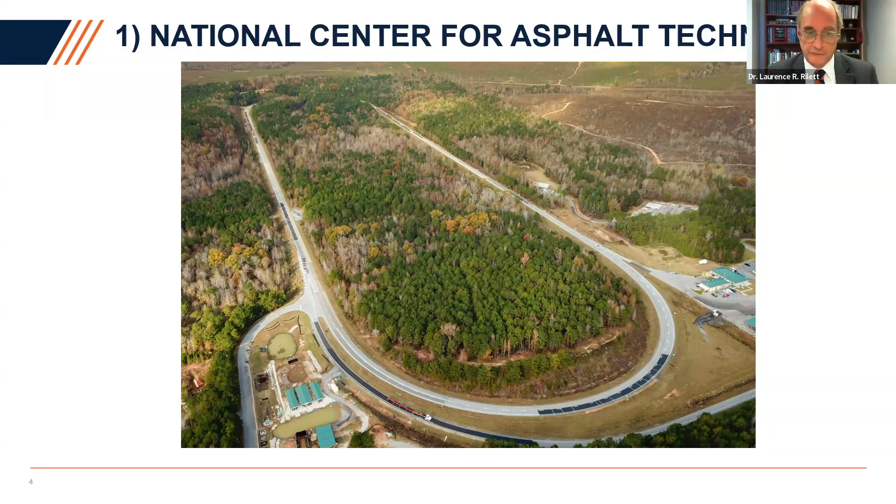We're probably most famously known for our National Center for Asphalt Technology. It's a 1.7 mile, about 2.7 kilometer test track for pavement with accelerated testing. They put down pavement in different sections and test them, accelerated with very heavy loads going around continuously: 5 trucks pulling 3 heavily loaded trailers, about 400 laps per day, on a 3-year cycle. Right now we're in our 9th research cycle. It's a way of testing different pavement mixes under accelerated conditions to see if they have potential for use on the United States highway system.

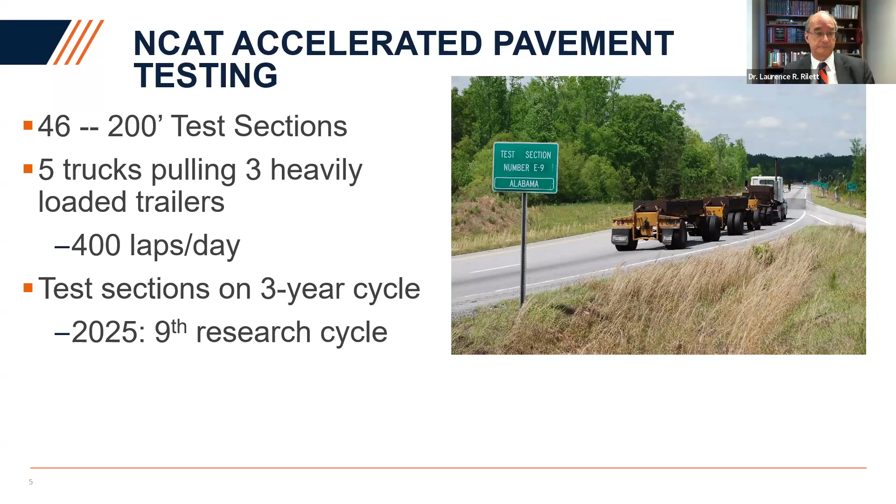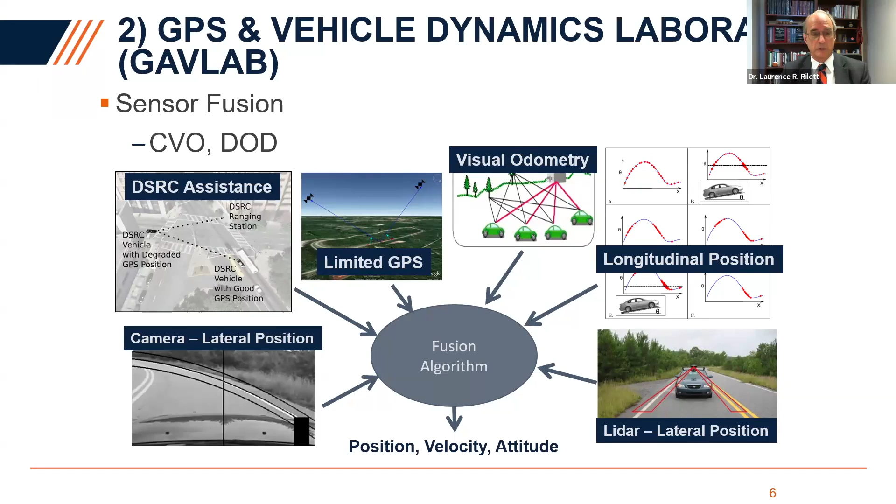We're also pretty well known for our autonomous vehicle work through the GAVLAB. As you can imagine, it's lots of different things: getting GPS, doing visual, doing LiDAR, fusing all that information together. The expertise here is on rural areas and degraded environments. So what happens if you lose your GPS? Can you still do autonomous vehicles?

We do have an autonomous Tiger racing team. You can see on the bottom right, I'm running the video right now. That's our race car. It's going approximately 170 miles per hour, about 20 miles less than the record for autonomous vehicles, but they've been running this for a number of years now. All the software, all the technology was developed at Auburn by our students.

And then lastly, what I do is looking at simulation. This is some work we're doing on simulation of everything: the driver, the roadway. We want to get to the point where we can simulate the vehicle driver, we can do an AI driver, we can do a complete environment, as well as the mechanical engineering of the vehicle. So that's our overarching goal: can we simulate all aspects of the transportation system? Theoretically, you could drive a transportation system, whether it's a roadway, an arterial, or a highway, before you even build it, and see what the issues could be.

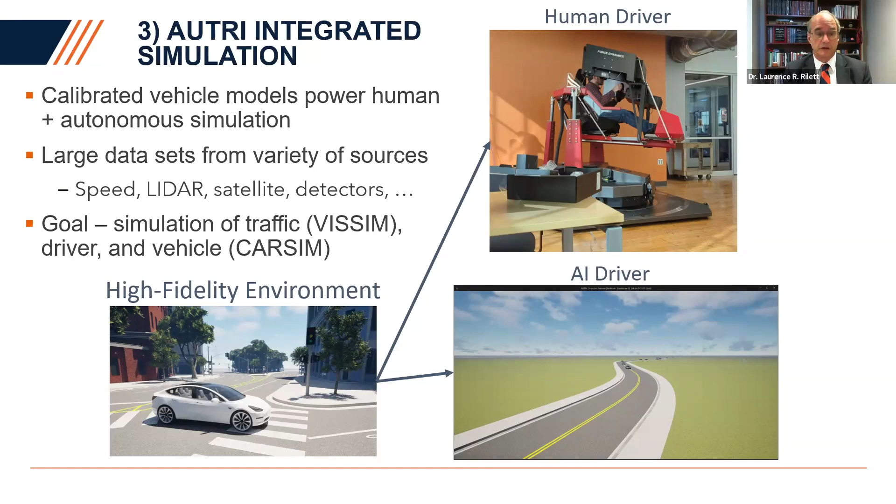So lessons learned, we're a very broad institute. We have lots of challenges related to big data. We were interested in resiliency, reliability, and sustainability. That's a very brief intro to our center, our institute.

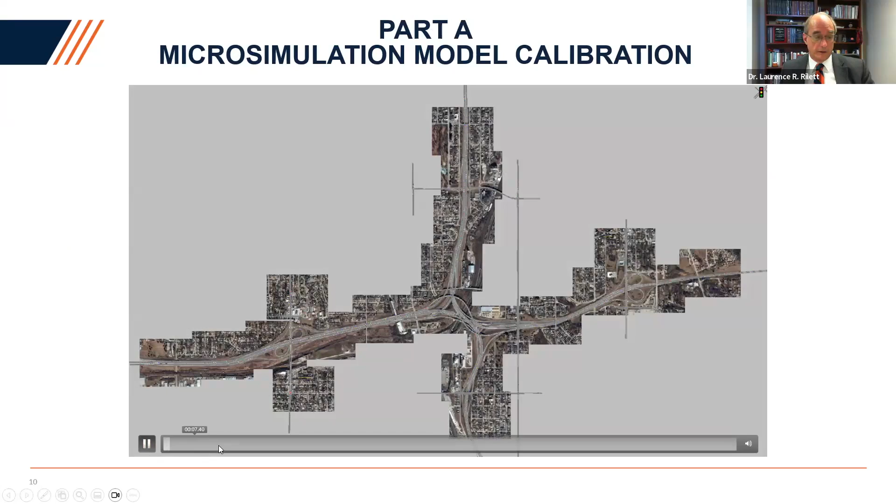And now I'll go on to the main part of the talk, which is microsimulation models. Right here we have a microsimulation model that we developed, a very standard one. This shows an interstate highway. You can see the vehicles moving.

You can do very sophisticated things. This model is a fairly old one, but it still shows the capacity of what you can and cannot do in terms of simulating traffic.

A natural question is that the models have become very sophisticated, with lots of parameters. The question I want to ask is, how do you know if this is a good model? My position is it's a good model, but only because I'm the one who developed it. So the real question is, how do we know something like this is actually replicating reality?

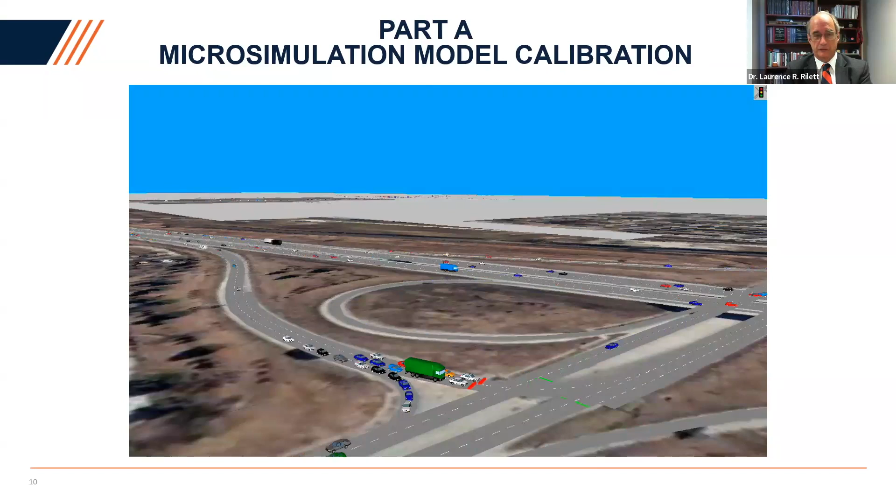The answer to that is model calibration. Very simply put, you have these default input parameter values in the model. We modify those so that the model accurately replicates the observed local traffic conditions. How do we do that accurately? We compare the simulated and observed data. The question really is, what criteria and what statistical methods do you use? That's going to be the focus for the next few slides.

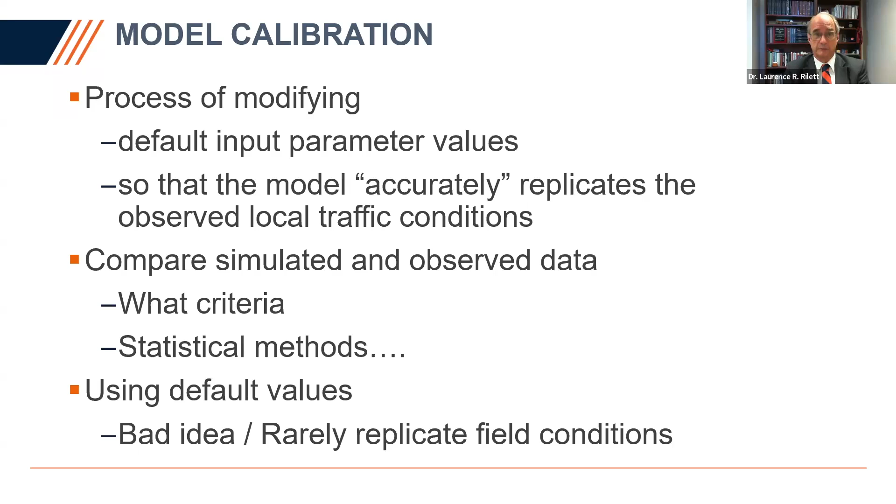So how do we know whether it's a good model? How do we make it better? As a caveat on all of this, using the default values, just taking the simulation model and running it, is usually a bad idea. It rarely replicates field conditions, and that's based on 30 years of experience. I've rarely had anything where I could just take a model and run it and be satisfied with the results.

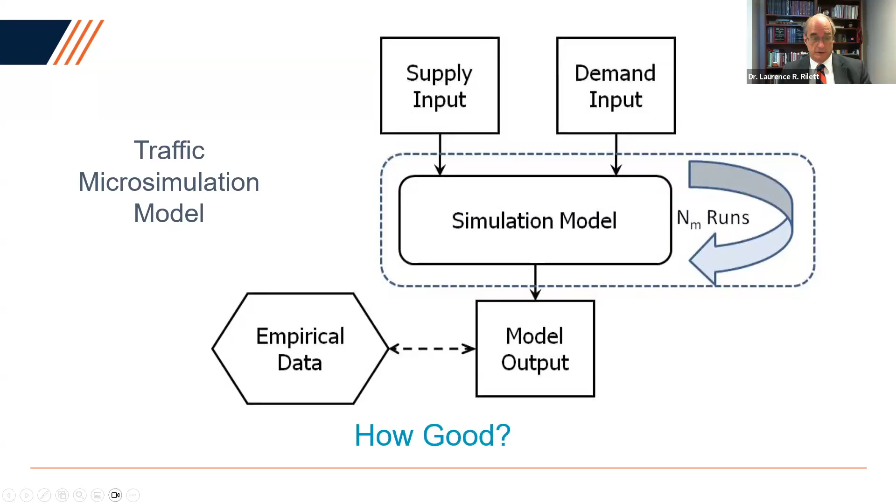Now, you might run it once, you might run it n times and then average it, but you do get model output. The question is, how do we know whether it's very good? You could take the model output, travel times, and compare it to empirical data, travel times. So how good is it? Well, you do a comparison - what do you compare? You could do statistical tests.

You could test the mean. You could use t-tests, mean absolute error ratio, what's the percentage difference - I'll talk more about that. There's lots of ways of testing whether the data that you're getting from the model actually replicates what's in the field.

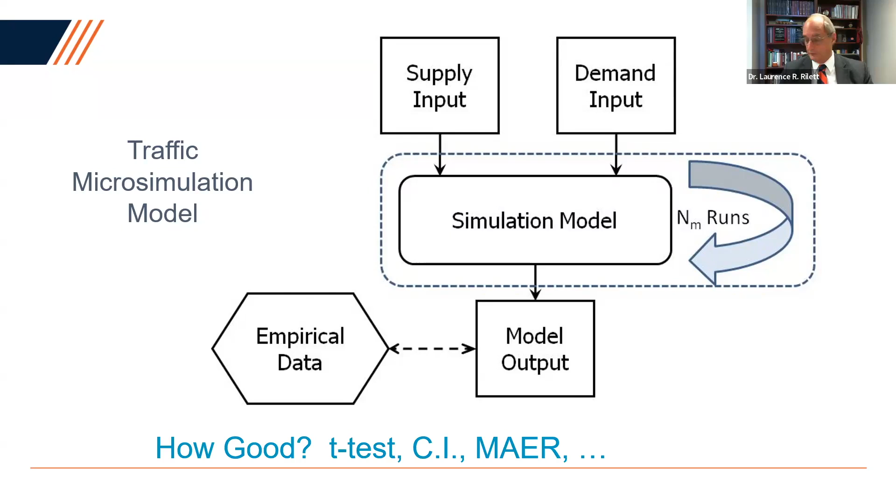Here's an example we did a few years ago. On the y-axis is average flow rate, vehicles per hour per lane. On the x-axis is station number, or length - there's different places where we're collecting data on a highway. The observed data is this dotted line. The red line is the 95th percent confidence intervals from the observed data. So we're collecting data, we kind of know what the average volume flow rate is, we know the confidence on it. And then the dark line is the simulated data.

The question then is, is this a good model? You might say, yeah, it's pretty good - it's within the 95th, so it's coming close to the observed, I'm satisfied with it. However, you could also say, well, there are parts where it comes outside the 95th, so I want to make it better, it's not exactly what I want. That's up to the modeler, obviously. But this would be an example of how you compare simulated data with observed data.

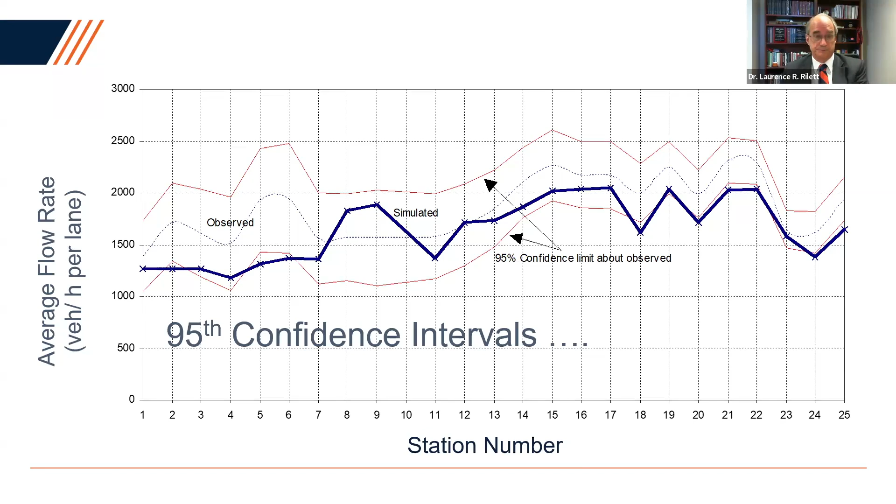If you didn't like the model, if you said, oh, I don't like this model, how can I fix it? If you're doing it by hand, you could say, well, I have my model output, my data. I could optimize it, I could change the model parameters and rerun it, and keep doing that until either I get a solution I like, or I can't find a solution - there's no way to calibrate the model to the empirical data, and at some point I'm going to stop. So calibration is just changing those parameters so that when it models the supply and demand, the empirical and the model output are similar enough that the modeler is satisfied.

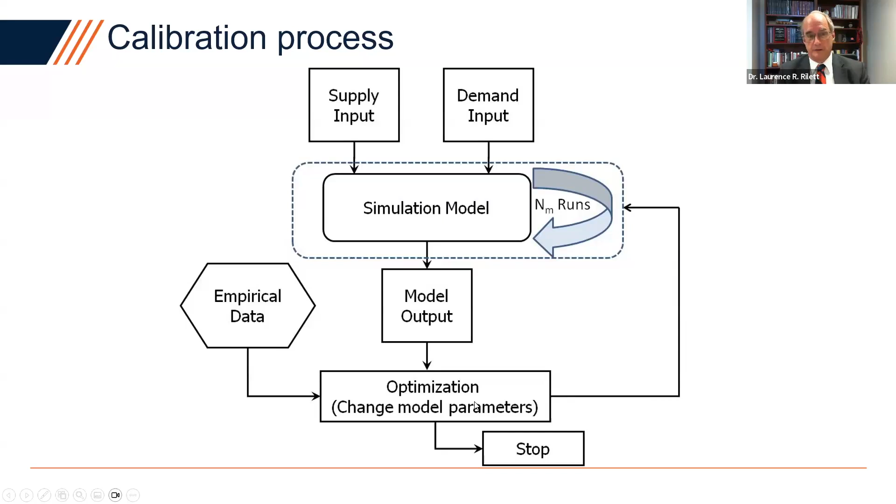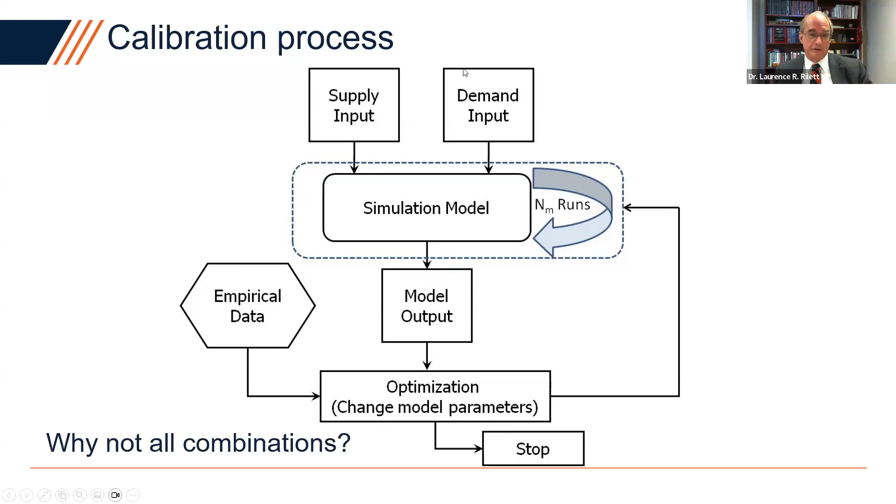So again, how would you test it? You could use mean absolute error ratio - I'll talk about that in a minute. You could do a t-test. There are others. A natural question is, why not just do every combination of all the model parameters? The answer is, you could quickly show it's in the tens of millions. To even do a simple model will take a long, long time to check all combinations. Even with our new computers, it's almost impossible to do that in any reasonable amount of time.

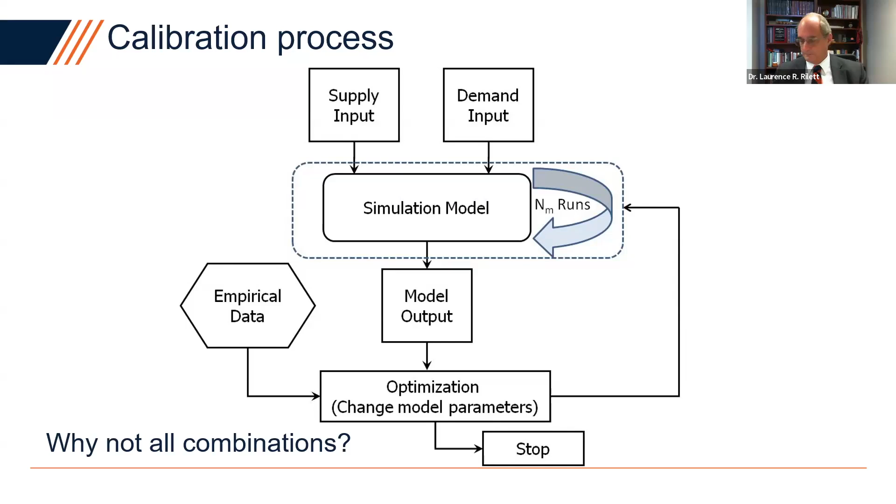So for calibration, what are the traditional measures of similarity? I picked root mean square, mean absolute percentage error, mean absolute error ratio. They're all very similar. You take your simulated data, could be average travel time, subtract off the observed number - what was the observed travel time - then simulated divided by observed. Divide by the number of observations, and you get an average percentage difference. The thing about these metrics is they're only valid if the distributions underlying them are identical. That's a pretty big assumption for traffic, and I'll show more about that in a bit. But we use it a lot - it's the average difference between the means.

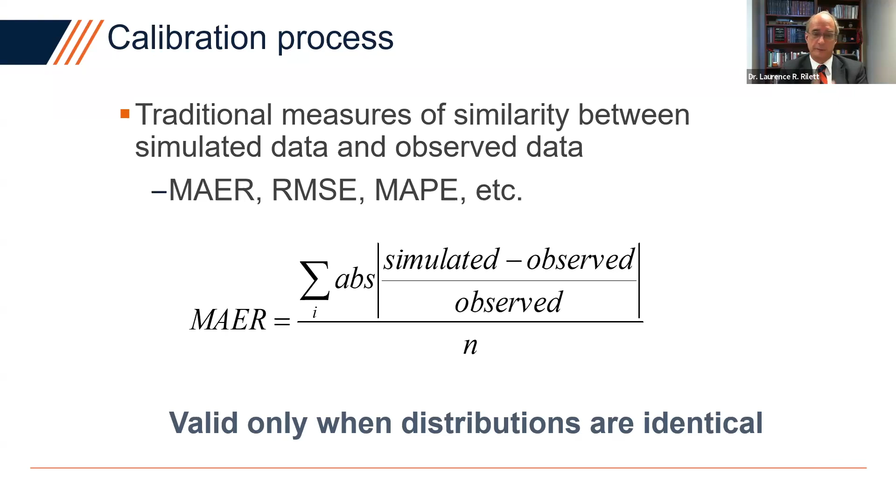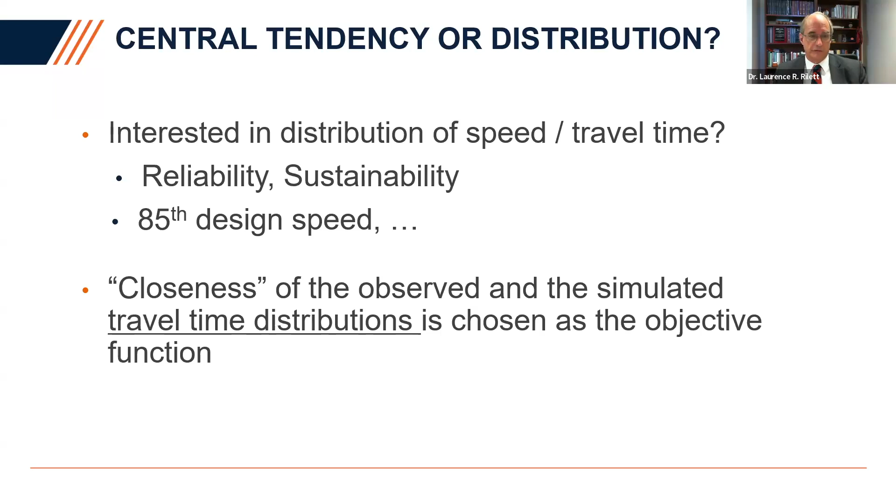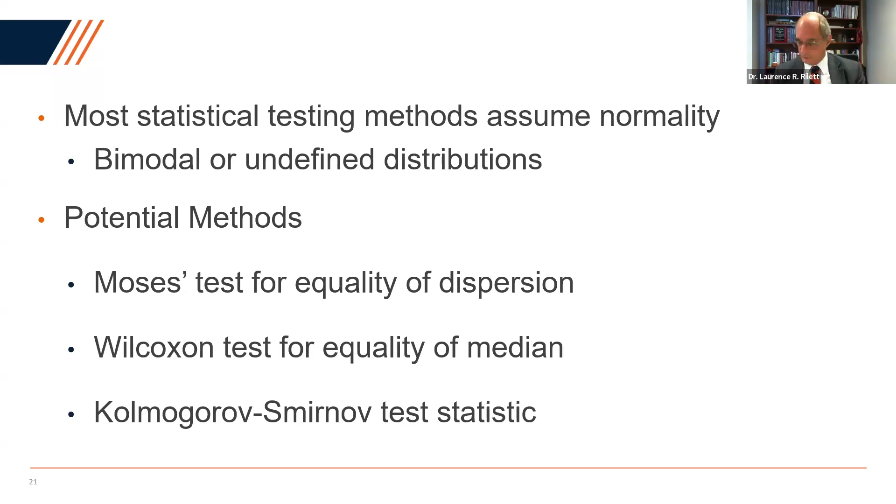Most statistical testing methods assume normality, but in transportation we get a lot of bimodal or undefined distributions - we don't know what the distribution is. In that case, there are non-normal modeling techniques: Moses test, Wilcoxon test, KS test. There are a number of them. We tend to use these three a lot when we're not sure that the normality assumption holds, which is typically what we find. So let me give you an example.

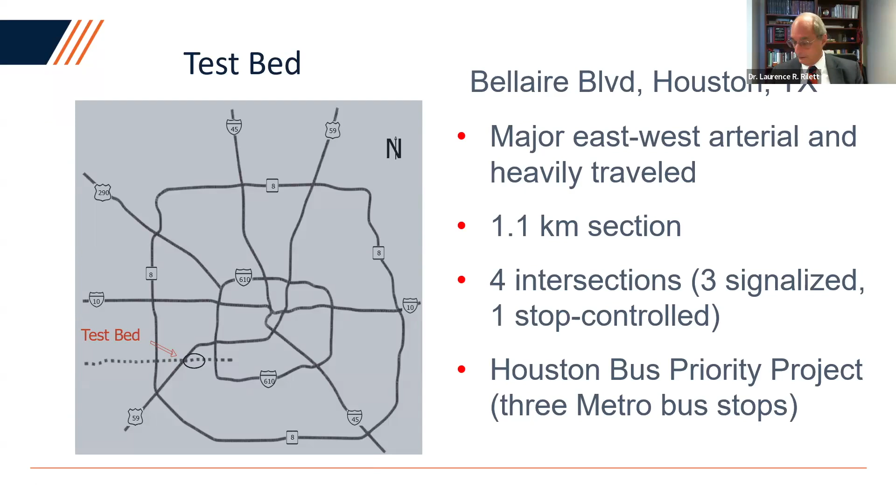So what we wanted to do is - could we simulate this? We could just run the model, buy the software, run it once, call it a day. But we wanted to calibrate it, so we wanted to compare the empirical to the model. We wanted to optimize. We used the KS test and Wilcoxon test because it's not normal.

We set up a genetic algorithm to do this automatically. You could do this by hand, but really you're talking tens of thousands of runs. We want to run the model, look at the output, change the parameters, run it again, change it again. We want to choose the parameters in some intelligent manner - we use the genetic algorithm. There's lots of different ways of doing this, but basically we're going to run until we get some optimization answers that are good, and then we're going to stop. So that's our process.

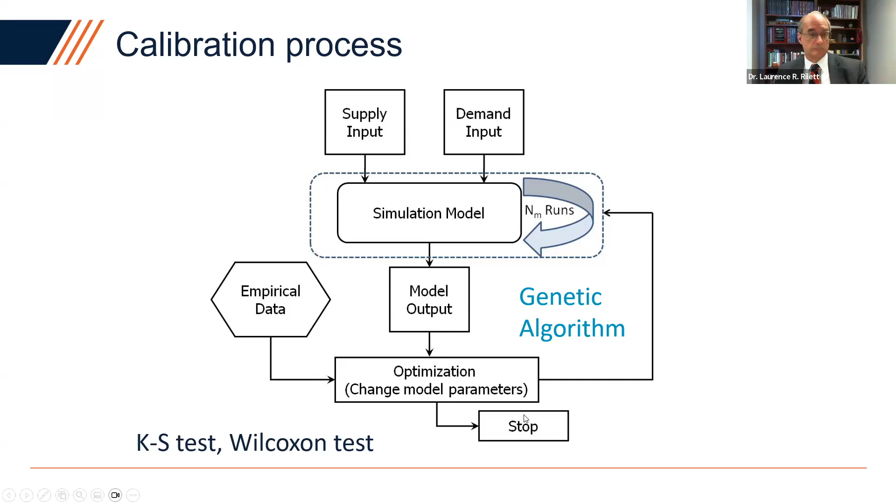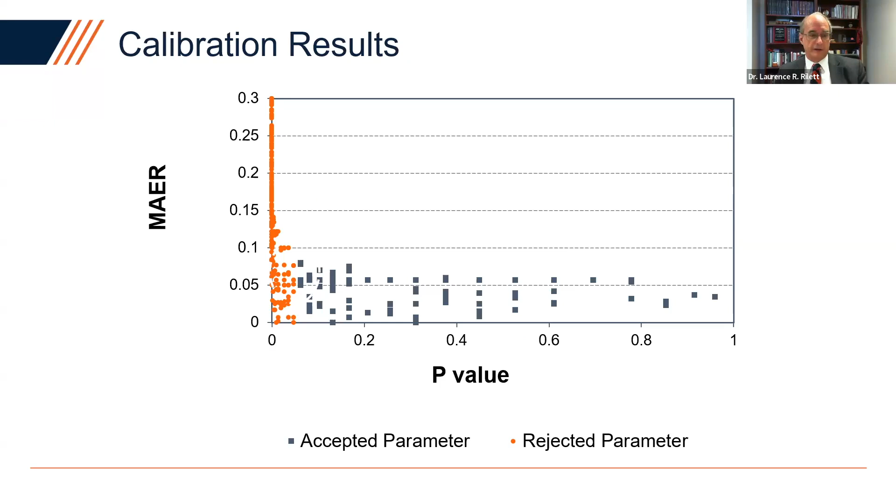So what does this graph tell us? Well, the first thing - if we just use the default parameter set, we'd get about 20% error. That is actually very good for a simulation model. Usually, when you just run a simulation model without calibrating it, it's oftentimes 80%, 100% off on things like mean average values.

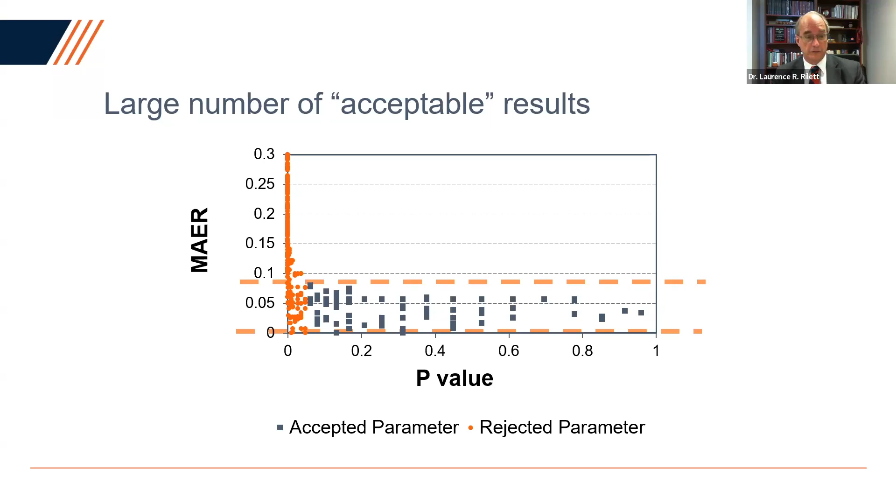When you look at the results, you can see that there's actually a large number of acceptable results that pass the statistical test. You can see all the dark blue ones, so that's good. Natural question is, how do you pick amongst them? That's a different question, but there are a number of parameter sets that actually give you statistically the same results as the empirical data. The acceptable mean absolute error ratio ranges from 0.7 to 6.7. So on average, the difference between the average travel time we measured and what we've simulated runs from about 7% and below for those values.

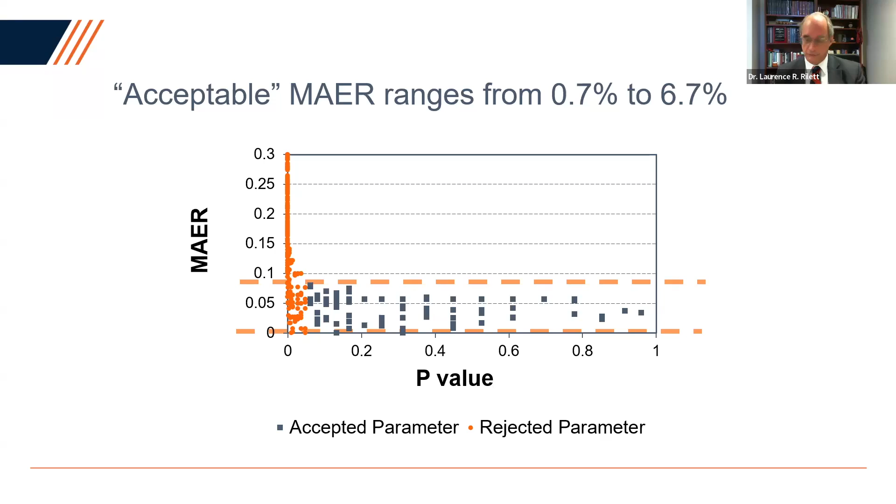The other thing to notice is that if you just did a calibration on average values, there's a large number that failed the statistical test, those orange circles. So what do I mean by that? I'll show that on the next slide.

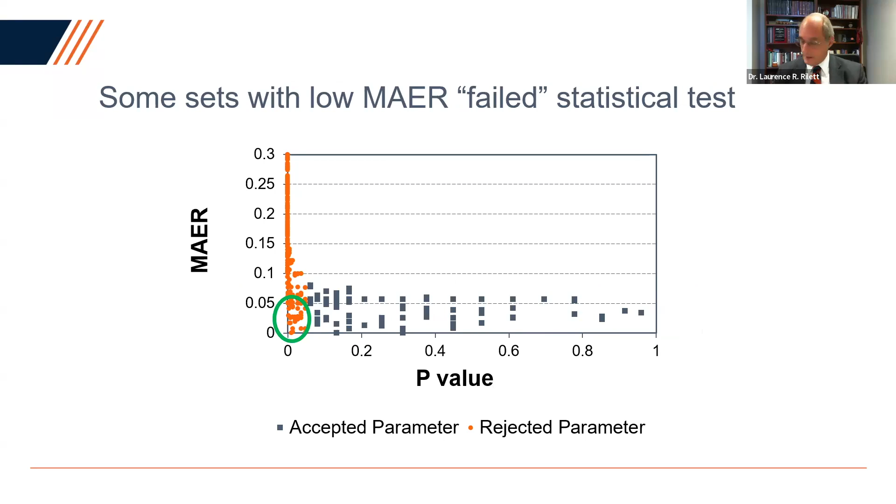So what are the lessons? Well, I can't stress enough: don't use the default values. I think most people understand that. You can calibrate models using new ITS, Intelligent Transportation System data. You can develop a statistically based calibration procedure. You can model bimodal travel time distributions. And it's important to calibrate to your application.

In this case, we were very interested in the distribution. If we had calibrated to the average, we would not be able to analyze it the way we wanted to, because we weren't calibrating to the distribution. So very straightforward—we have developed this over the years. Ours are all automatic. We run these fairly often. We've computerized them, so it's very straightforward to run the calibration models for different simulators—this model happened to be VISSIM, but we could have used Paramics or any of the other microsimulation models.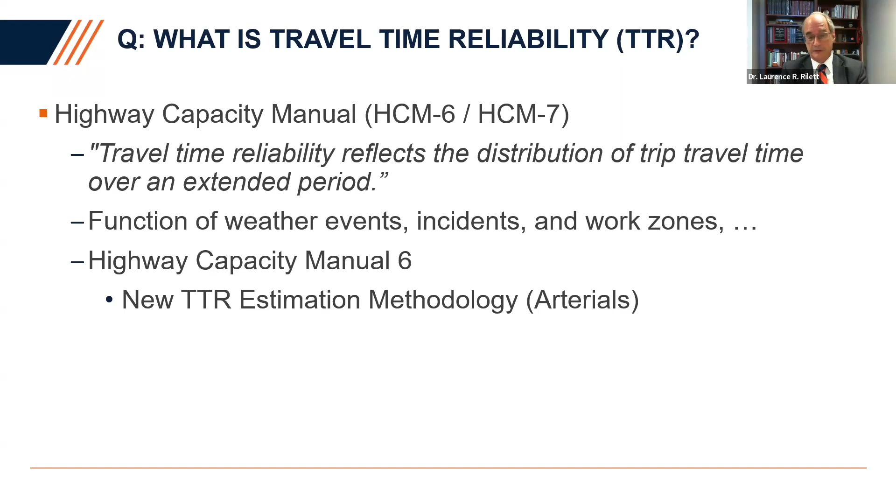So you can see number of trips, and you get a travel time distribution, right, similar to the slides I showed before. So this is an estimation model, a forecasting model that you can use on existing roadways. You can also use it for roadways you're planning to build, okay? And from that you can get travel time performance, reliability performance metrics—for those of you familiar with it, planning time index, buffer index—just ways of measuring how reliable the system is. I know I'm going through this fairly fast, but I think the key points are they have a method for developing the travel time distribution, and from that, they can do reliability estimations.

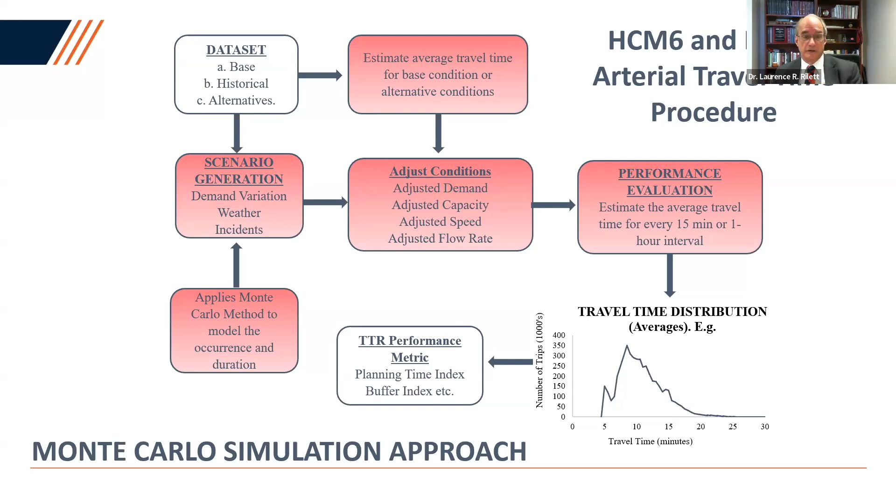We were very excited when this came out. We thought, oh, this is great, this will be really helpful for what we do. It was an important step. As I said, it estimates the distribution as well as the mean and variance, obviously, and from that you can get reliability performance measures. The interesting thing about this process—this is the design guide for the United States.

Nowhere in the literature did they talk about how they calibrated the model. Nowhere. So we thought, well, let's test it out. Let's test this model that they're telling us to use against empirical data, because right now we have lots of empirical data. I'm going to show you one example.

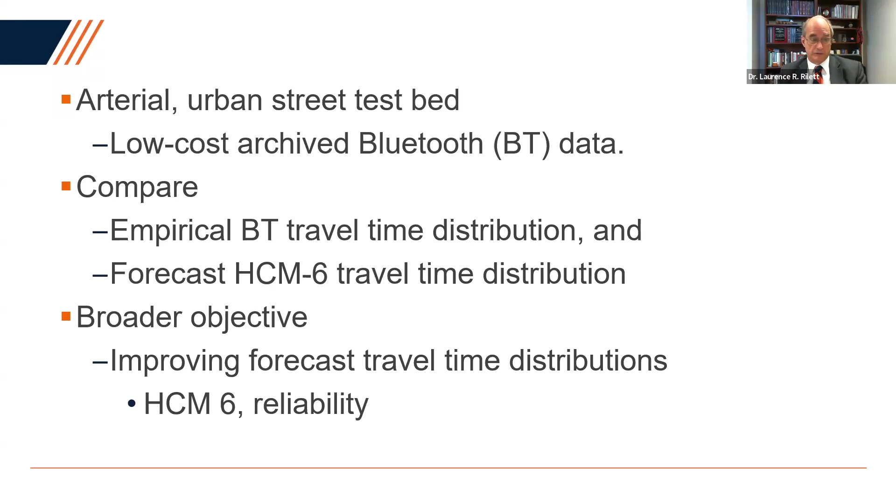We're going to do travel time distributions on an arterial road, and we want to compare this methodology with empirical data we measured. So what data do we have? We have a lot of low-cost archived Bluetooth data, so travel time data from one point to another. We want to compare the empirical Bluetooth data to the forecast HCM travel time on these corridors. The objective is to improve forecast travel time distributions, or reliability.

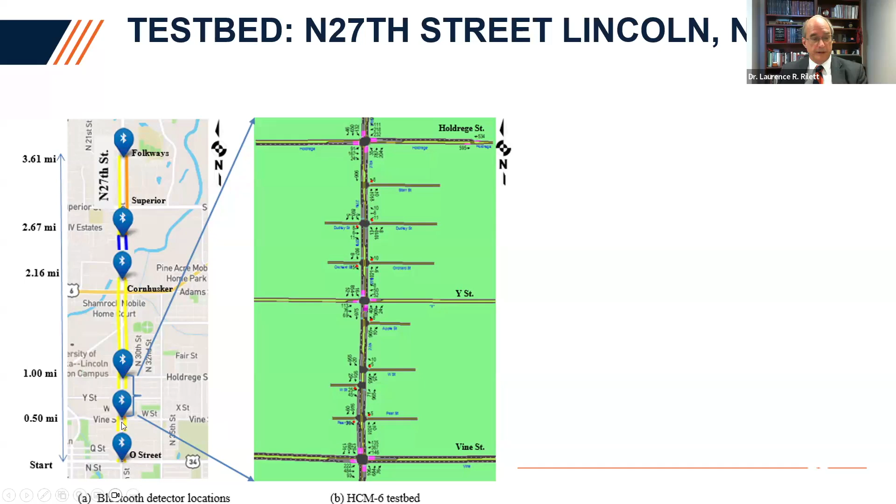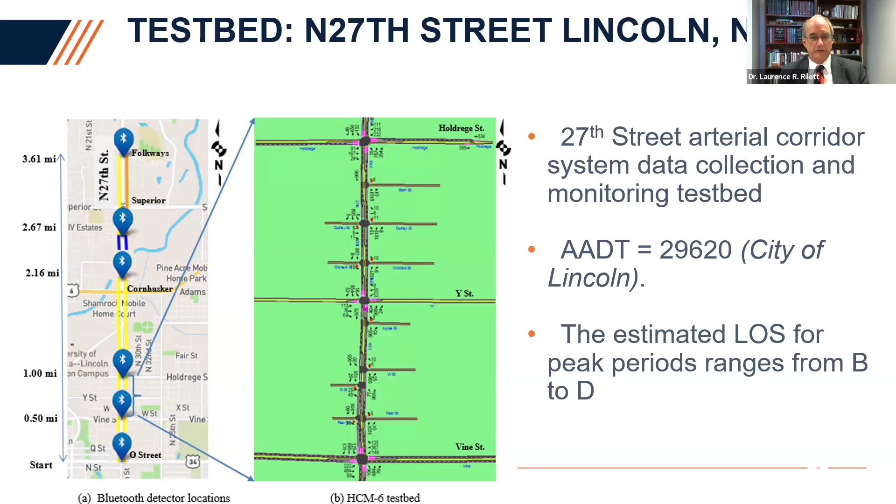Here's an example. You can see it's about a 4-mile section of corridor. This happens to be in Lincoln, Nebraska. It's about 6 kilometers long. It has a number of traffic signals along it. The blue lines are where our Bluetooth data is, so we have fairly good travel time information on this corridor. It has a fairly high ADT of about 30,000. For those familiar with level of service, it ranges from B to D, so it's not completely congested, but it has high volumes. Lots of delays on this road during rush hour.

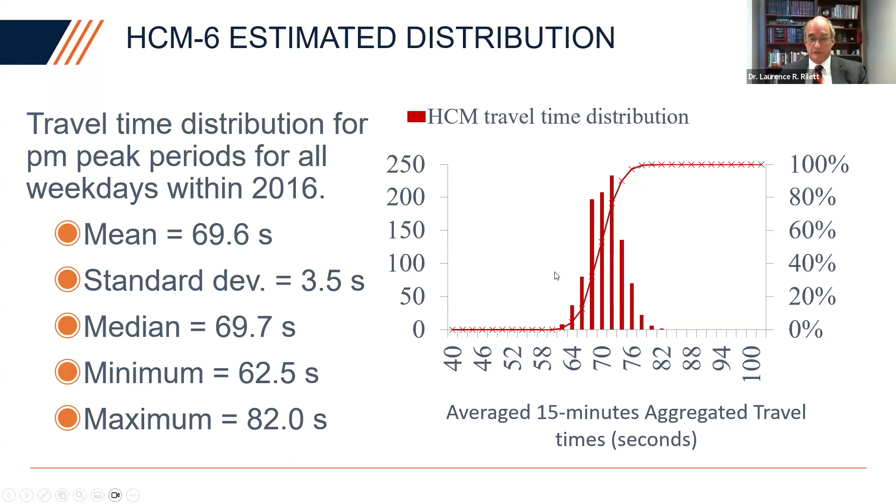We then ran the Highway Capacity Manual for the same period, and you can see it has a fairly similar mean. So the model is arguably not bad at picking out the average distribution. But you can look at the standard deviation, or the spread, and you can see it's much tighter than the empirical data. Here's a comparison of the two.

So the HCM procedure, which is a simulation approach, underestimated the travel time variability and therefore underestimated the reliability of this corridor. So if you're using it to model reliability, it would be pretty wrong. From a user perspective, it's really problematic because the HCM indicates the corridor is much more reliable than the empirical data might suggest. And I should say, I'm just showing you one example. We did this across the country, across different arterials, thinking we were doing something wrong, but at no point did we find one that worked in terms of matching the empirical data.

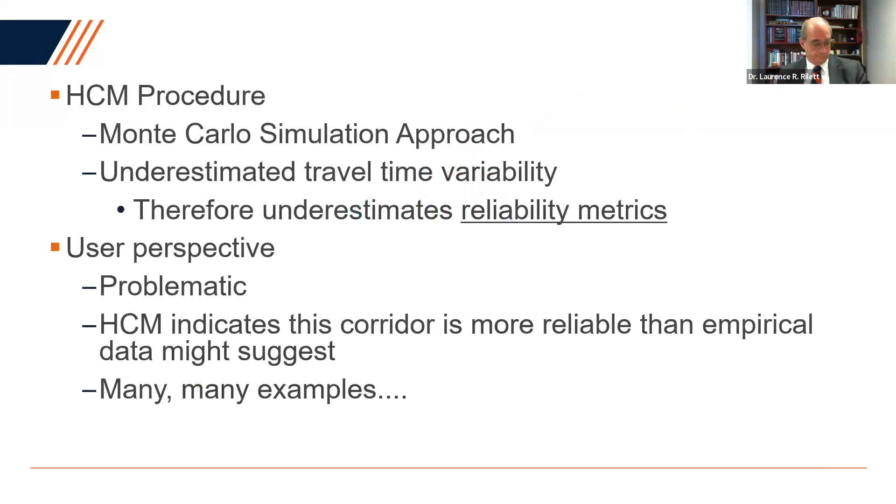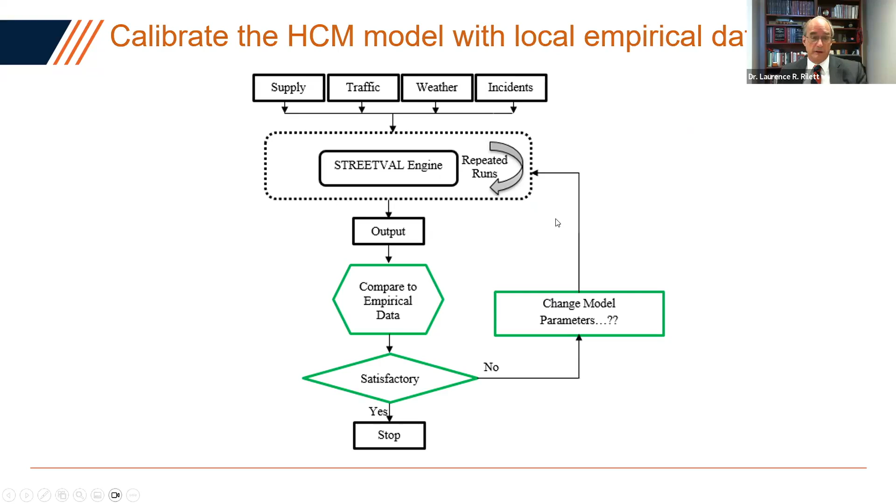So the next question that came up was, well, could we calibrate? We talked about how we calibrate things. Could we calibrate the model? We have the empirical data, we have the output, we could change the model parameters within the HCM. Could we calibrate it? The short answer is yes.

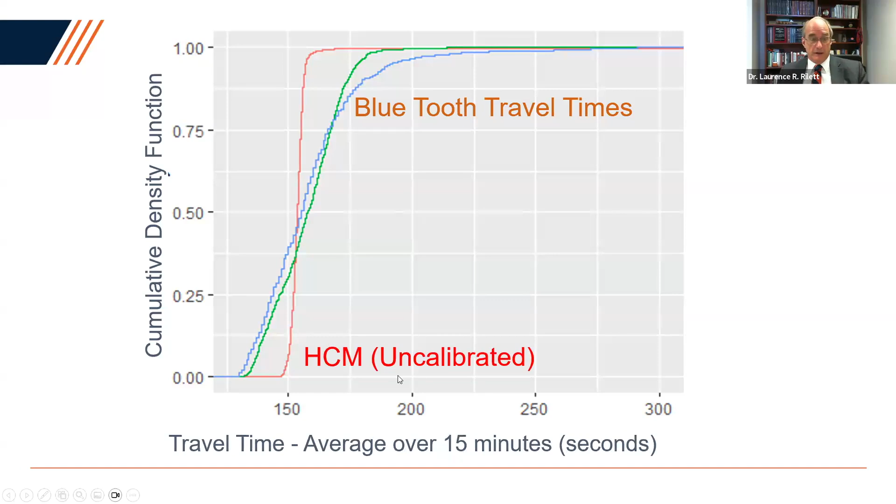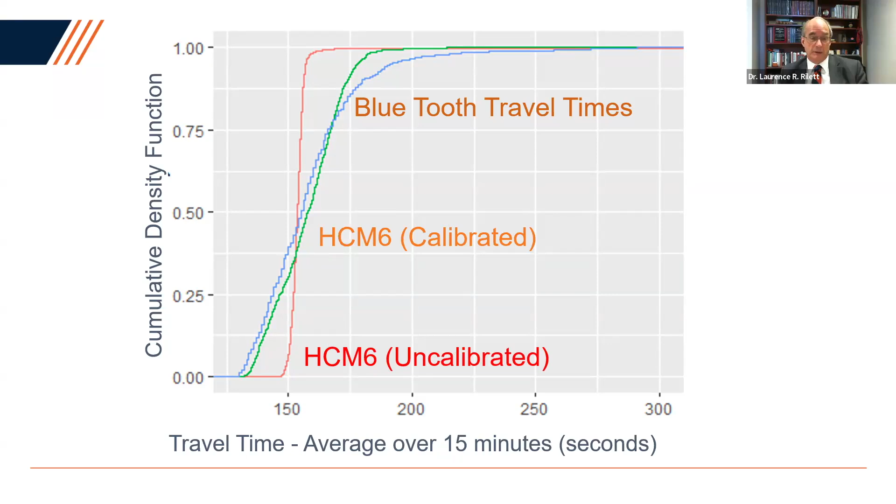The Bluetooth travel times are shown in blue. The HCM uncalibrated, shown as a cumulative density function, is red - you can see they're well off. And when we calibrated it, you can see with the green, it came very close to the Bluetooth data. So could we fix the model? Sure, we could fix it so that the HCM actually replicated what we were seeing. So we could calibrate it to the empirical data.

So, lessons learned: reliability is increasingly important, understanding the variability of travel times. There's a need to forecast travel time distributions as well as the mean and variance. And you really have to calibrate and validate to local conditions - that's our number one takeaway. We never came up with a calibration that worked across the United States. It was always, could we, in this city, find the values that work for the empirical data.

So in summary, traffic microsimulation models can be applied anywhere at a low cost. We're starting to see our manuals adopt these. HCM6, as an example, is using Monte Carlo simulation.

However, the whole focus of my talk is that skipping the calibration step is often a bad idea. In fact, it's a really bad idea. You should calibrate to your local conditions. What we found is that you can't go into one city and then go to another city and assume that calibrated model will work. You really need to focus on the specific application. If you're interested in distributions, you need to calibrate to the distribution, not to the mean.

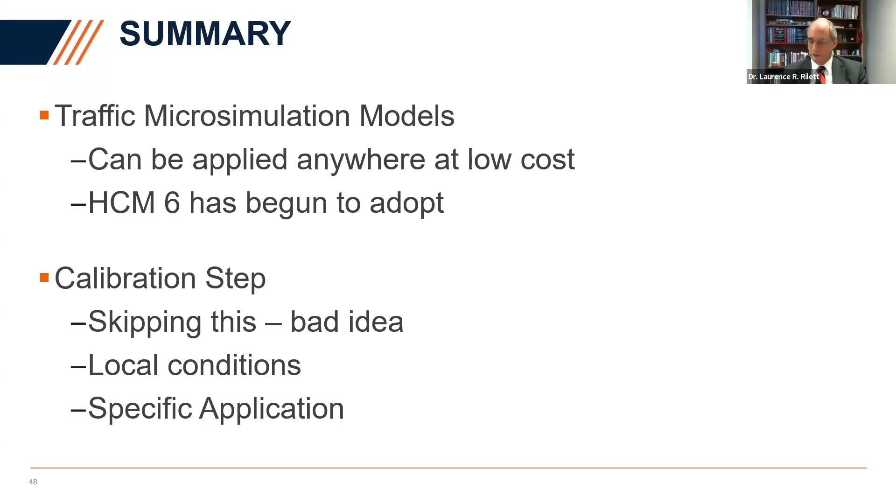In closing, I've worked in this area a long time. I always love this quote from a famous statistician, Box: all models are wrong, some are useful. I often take this approach when we're talking about simulation.

Is the microsimulation model we're using useful for the application? Is it giving us the information we need to do the job? The second question really is, have they been calibrated for the application and the location? If so, these models could be very useful to you. It's unlikely they're going to be 100% correct, but they could be very useful. If they haven't been calibrated, it's unlikely to be useful because it's probably not going to measure or replicate what's in the field.